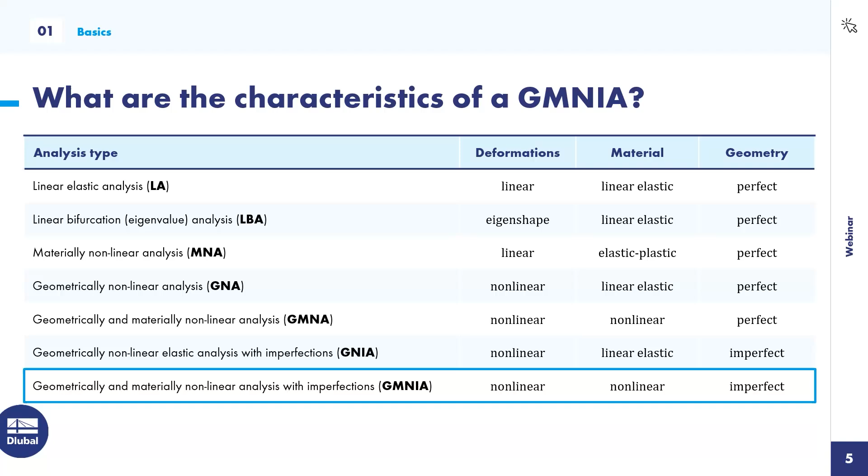Some rules for the application of the finite element method in this context are given in Eurocode 3, part 1.5, Annex C. This will shortly be replaced by a dedicated Eurocode dealing with finite element methods and their application for steel structures, bundled in Eurocode 3.1.14 in the second generation of the Eurocode. I will refer to this new code as well during this presentation.

You can think of the GMNIA as a virtual capacity test, which means that the design load is increased by a load factor until a clear state of failure is reached.

This is usually given by the annex or the base code as 5%, which is tolerable, but there might be some additional requirements in the national annexes.

The critical load factor is then the minimum of those two alpha U values, and this is then checked against the product of two safety factors on the resistance side, namely alpha 1, which describes the uncertainty of the numerical model, and alpha 2, which describes the uncertainty of the load and resistance model.

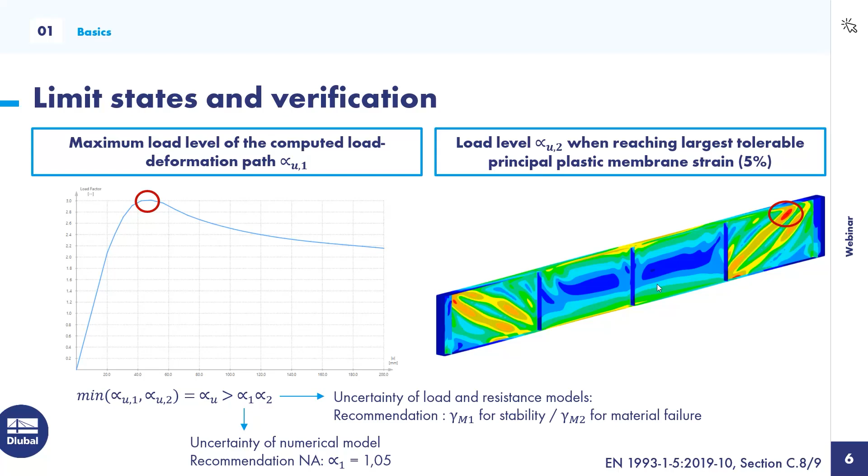So let's move on to the description of the design example for this webinar. We have a welded plate girder with a total length of 18 meters, simply supported at its ends.

There are some virtual purlins that are not explicitly modeled that rest on top of the top flange at the ends and also in the quarter points, transferring loads from the roof structure maybe to the plate girder and also at the same time supporting it laterally.

To avoid local instabilities at those load introduction points, we place stiffeners below them, and we should also take care that the end posts or the end stiffeners are detailed as rigid end posts, so they can anchor back the membrane forces and avoid excessive deformations of the external shear panels.

The cross-section is shown here on the left side, so we have a very slender web plate with a height of 1 meter and a thickness of only 5 millimeters. And the flanges have dimensions of 20 millimeter thickness and a width of 360 millimeters. The material is a mild steel S235.

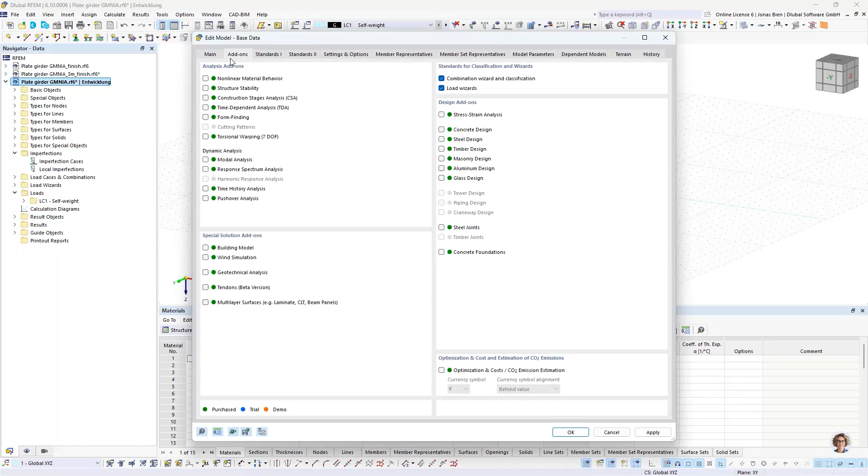All right, after we clarified this, let's go into the program and start modeling this. I have already prepared a fresh file where we can now introduce the plate girder. As you can see, I have no objects here whatsoever, and also if we look into the base data of this file, there are no specific options activated. It's all a standard type of model, 3D and so on.

Okay, so first of all, let's start with the material. We said we want to use an S235. So let's choose one. I always like to choose one that is related to Eurocode 3, but another one would also work.

Then let's move on with the modeling of the member itself. We could either directly go with the surface definition and try to place the flanges and the web plates in the correct locations, and also then we have to assign the correct thicknesses and so on. But we can also use another way: we can first start with a member that has the correct cross-section, and then we transfer this member into a surface model.

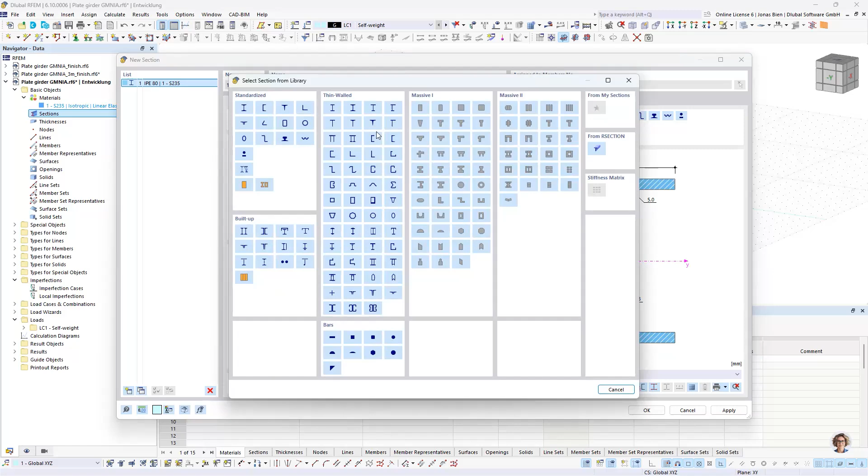So I start with defining a parametric welded double symmetric I-section in my section dialog with the respective dimensions that I want to have. So height is 1020 millimeters, width 360, thickness of the web would be 5 millimeters, and the flanges 20.

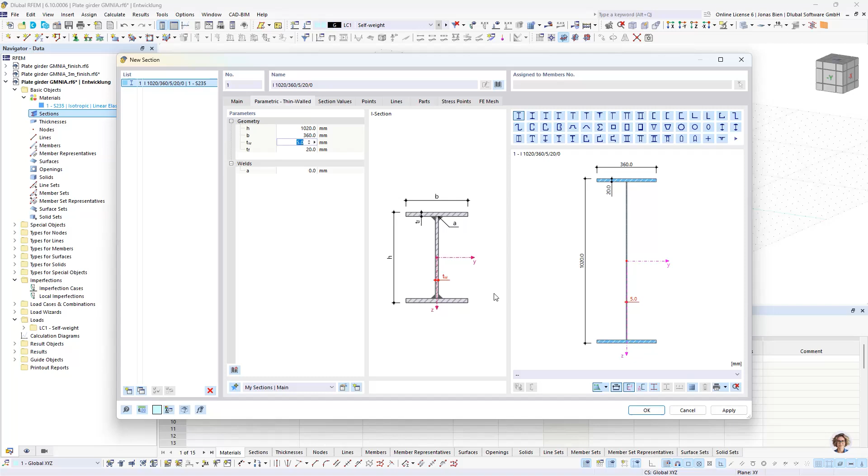So now it more or less looks like the picture that I have shown on my slides. I accept via OK, and then I just place half of my plate girder in the model. So one span was 4.5 meters, so I want to take in the initial model 2 panels, and then we can later mirror it.

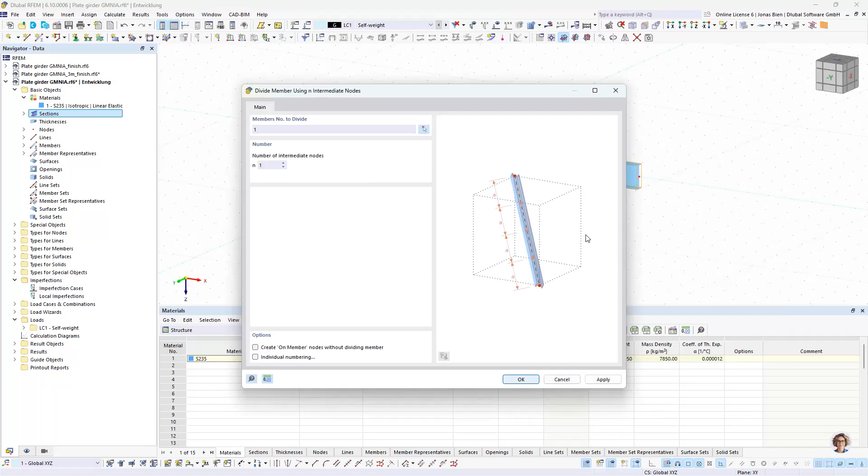So before I generate surfaces from this member, I also divide it, because I want to have a stiffener and some load introduction lines at the central position here. So I first divide this member with one intermediate node, and then I move on and generate surfaces.

And what this does, it already automatically generates these thicknesses that I need to represent this section in a surface model. It creates the nodes, the lines, and finally the surfaces that are necessary for this model. So this is a good starting point, I think.

Next, we want to create the stiffeners to finish the surface modeling part. Therefore, I need an additional thickness of 12 millimeters that I wanted to use for the stiffeners. I can also write a reminder for myself that this is for the stiffener, this is the web plate, and this thickness is defined for the flange plates.

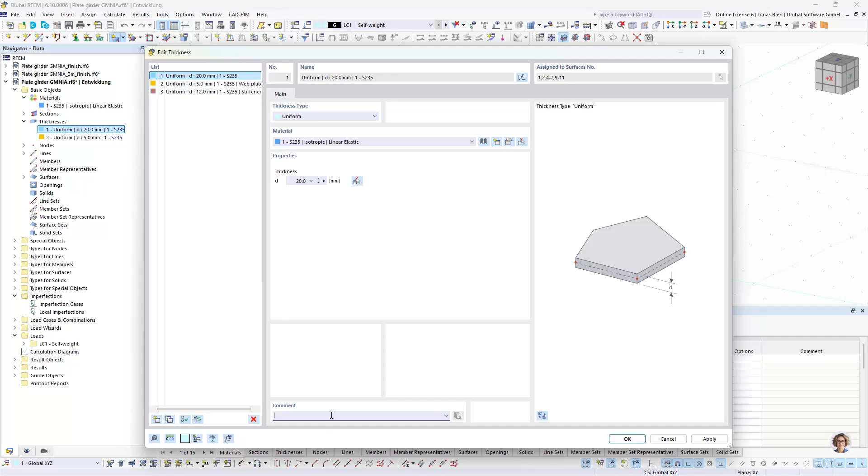Okay, I agree. And then I just place some rectangular surfaces in those positions where I later want to apply the loads. And thinking about this as the left half of our plate girder, we also said we want rigid end posts, so I would generate this by adding an outstanding cantilever part here with an additional stiffener to really have a very compact section at the end.

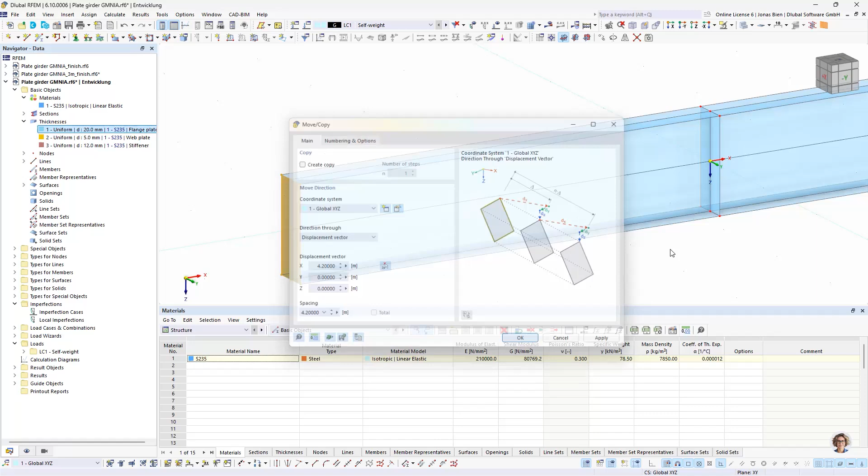I can achieve this modeling variant by just copying this panel here to the end. The length of this is 4.5 meters, and I want a very short and compact cell at the end. So I move the end section back towards the initial position of this stiffener by, let's say, 4.2 meters, and then I have a nice rigid end post without needing to define additional surfaces by hand.

Okay, oops, didn't mean to do that.

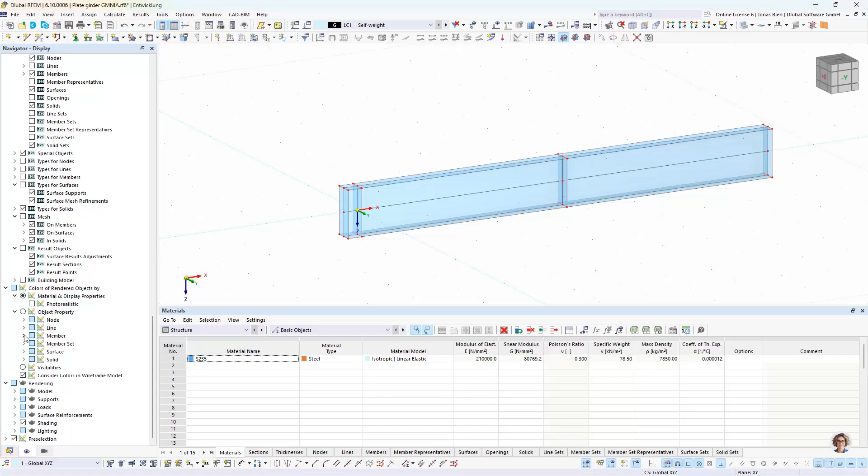So then we can check if we assigned the correct thicknesses. I always like to check the rendering based on thickness, so we get a nice overview of what thicknesses are represented in the model and where they are. This all seems fine to me.

So we can continue with assigning the supports. I want to avoid singularities at the vertical supports, so I try to use line supports at this second line of the stiffener. I just want to support this line in Z direction. I don't want to restrain any deformation along the line or in the transverse direction.

I only support... I already see another problem because we defined those rectangular stiffeners over the existing surfaces, so we have some double lines here. We can quickly merge them by cutting and merging via this tool, and now we have single lines at these locations. That's a quick fix. Now I move on and assign the vertical supports at these two lines.

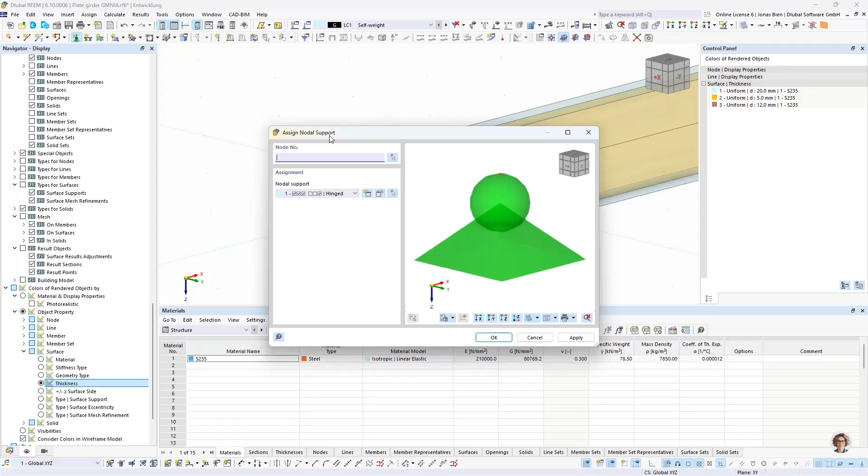Then I need to take care of the lateral supports. These I assign as nodal supports at points that are very stiff. First, I have my lateral supports at the ends and also at these quarter points. I choose as a point of reference the crossing between flange, web plates and the stiffeners. I also need to couple this point in Y direction so it does not tilt.

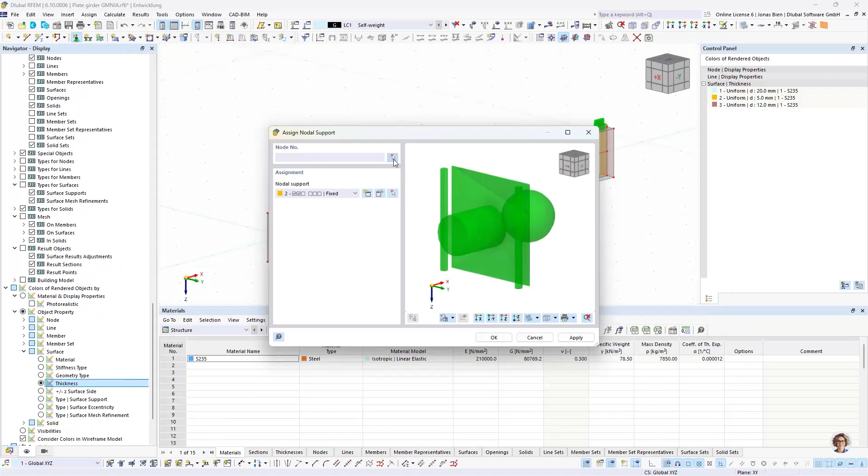Also I need to somehow support my model in X direction. That's why I want to define one support in global X and Y direction at the lower flange, like here. So that would be the respective support conditions I want for my half model.

I can later also mirror them when I want to create the full model. But before we do so, it would be wise to also define the loads, because there we can also leverage the mirror operation. So we go ahead and define our loads.

Maybe one look back to the task description. Here we can already see that we have concentrated loads, three different loads, at the endpoints and the quarter points. The first one represents dead weight, the second comes from snow, and the third comes from wind pressure.

These I want to define separately for those three load cases. So let's start with the definition of the dead load in the first case. I want to apply these loads as line loads, again to avoid singularities when using nodal loads. I could calculate my equivalent line load for a concentrated load of, for example, 15 kilonewtons by hand.

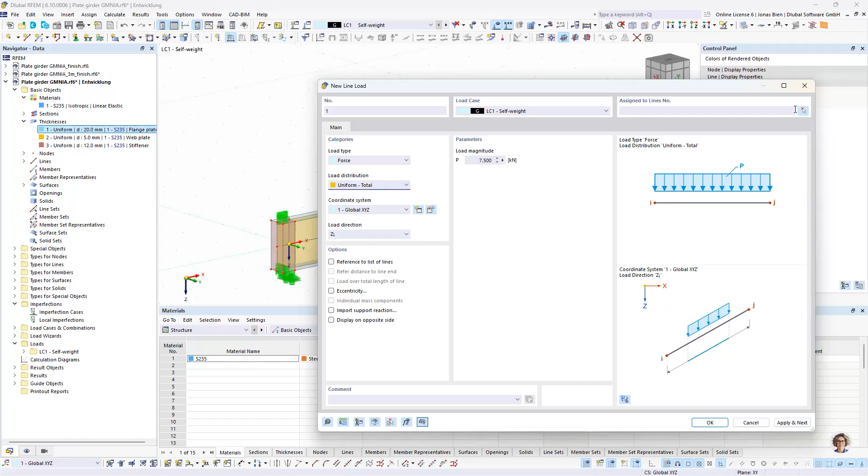But I could also use load distribution type uniform total, where the program does this job for me. I just have to enter the total load I want to apply over the length of one line. Since I have two lines here, I need to divide my 15 kilonewtons by 2 to get the total load for one line. I want to apply this in Z direction, select those two lines, assign it, and RFEM already calculated the correct kilonewton per meter value for us. If we multiply this value by 0.36 for the width of this flange, we get 15 kilonewtons in total, as we wanted.

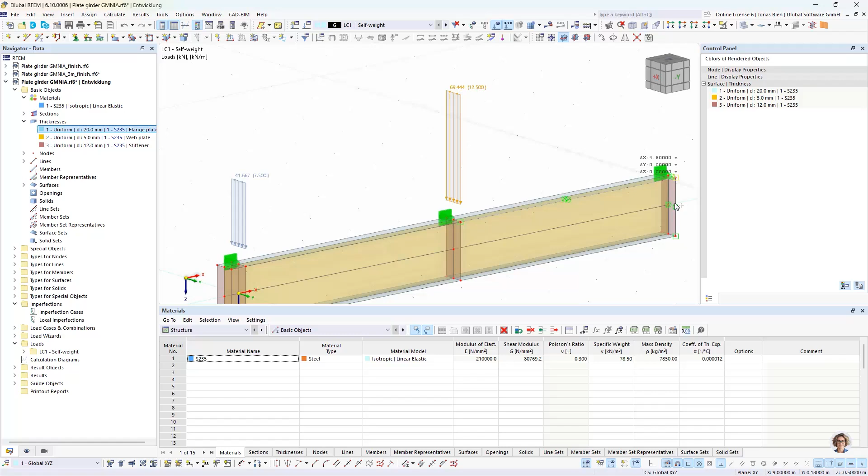Okay, we can then just copy this definition to the internal lines or purlins where the load is transferred to our plate girder. Here we had a slightly higher load, I think it was in total 25, so each line gets 12.5 kilonewton. This definition we can also copy to the central lines here.

Now we make a smart move and generate our second and third load case from our first load case, by copying it. This means that also all loads defined in this load case are copied, so we just have to change the action category. First I want to define the snow loads, and we have to take care to deactivate the self-weight if we copy from the self-weight load case, otherwise that would be considered twice. We do the same for wind, choose the appropriate action category, and click OK.

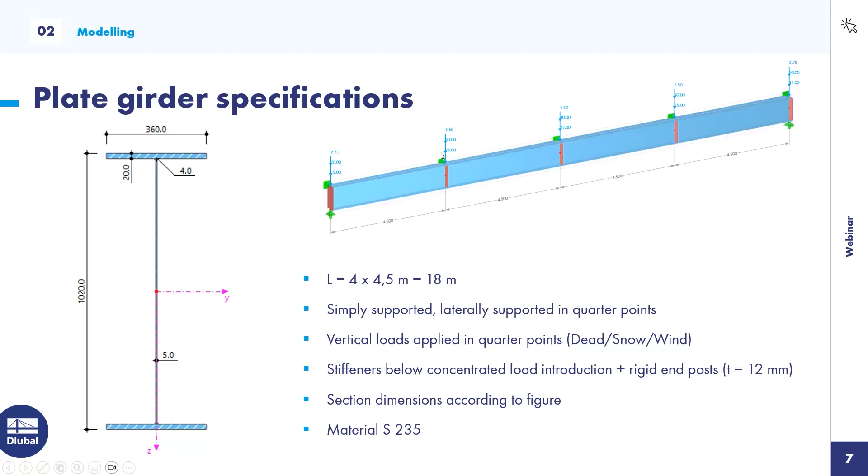Now we can go to the table. This is the easiest way I find to manipulate those load values, because we just want to change values. As you could see in the slide, we have the same load type for all load cases, just different amplitudes. For snow we would have 20 kilonewtons and 40 in the internal positions, and for wind it would be 2.75 and 5.5 in the internal positions. So we just need to change the values basically. Let's do this via the table.

For the snow load, we had 20 kilonewtons divided by 2 and 40 kilonewtons divided by 2 in the internal positions, and then for wind it was 2.75 divided by 2 and 5.5 divided by 2. This gives us the respective concentrated load distributed to those lines.

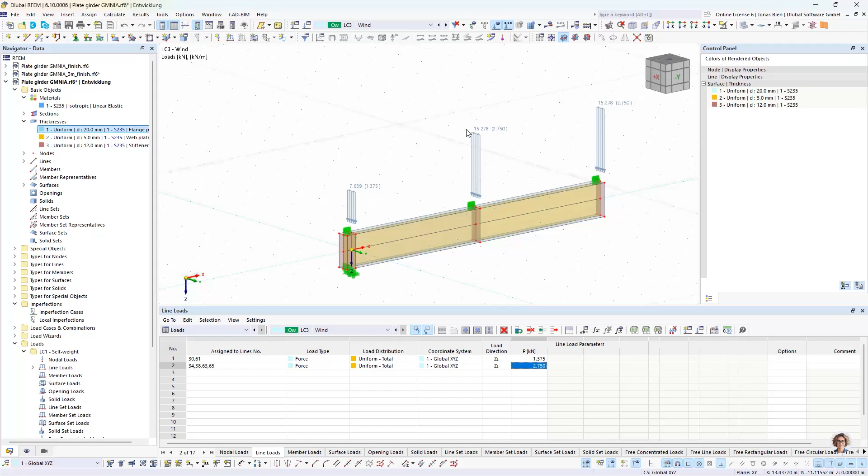All right, I think then we can already mirror the whole thing. Maybe I don't want to mirror this load here, because we have already defined this for the central position, so I don't want to do that again. Now I mirror all the selected objects about the YZ plane, and the plane should go through this point here. I make sure to copy the included loading and click OK.

I think by doing a copy included loading, it also recognized all the loading on these lines and copied it, although I did not manually select it. So now, as you can see, we have a double load here, and we just quickly delete this. Then I only need to do one additional modification of this mirrored part.

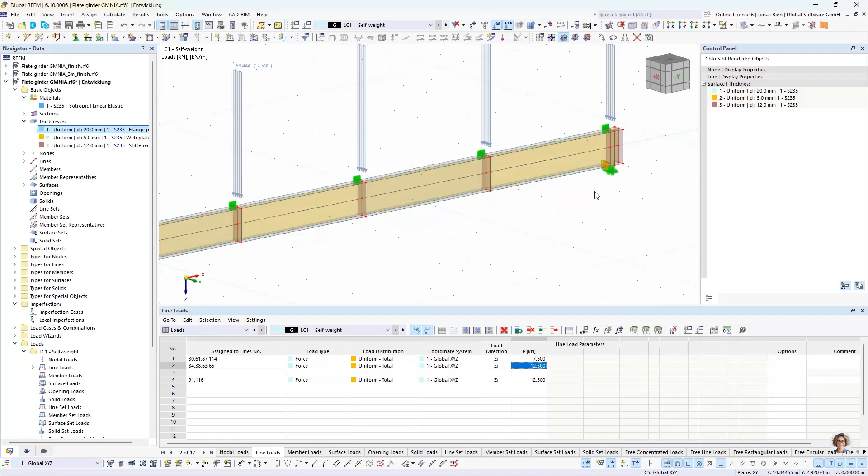I don't want to hold the plate girder in X direction on both sides. I don't want to activate any membrane forces here coming from large deformation in X direction. So instead of using support in X and Y direction at the end node, I just copy the definition from above and place a nodal support that supports in Y direction here instead, so it is free to move in X direction now.

Then one more important part when creating a surface model in the context of steel design: usually our base settings for the mesh are not really suitable. This element length of 0.5 meter is more suitable for, I don't know, concrete slabs and foundations, so not for us. Otherwise we would only have one or two elements over the height of our plate girder, and that wouldn't be sufficient to get a good model here.

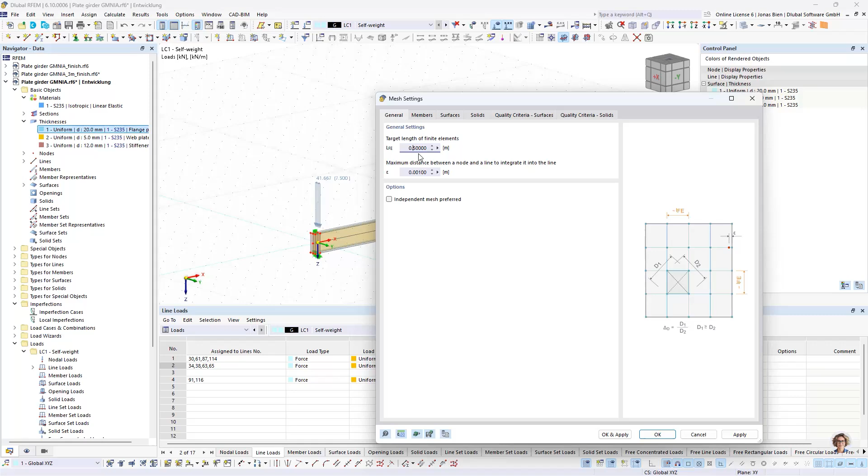So we just use 5 centimeters in the first step and check the mesh visually to see if it is reasonable. I think in the first step this is all fine. It is always advisable anyway, in the context of a GMNIA, to make some sensitivity study of the mesh refinement at some point, but I think this is a good starting point, this level of refinement.

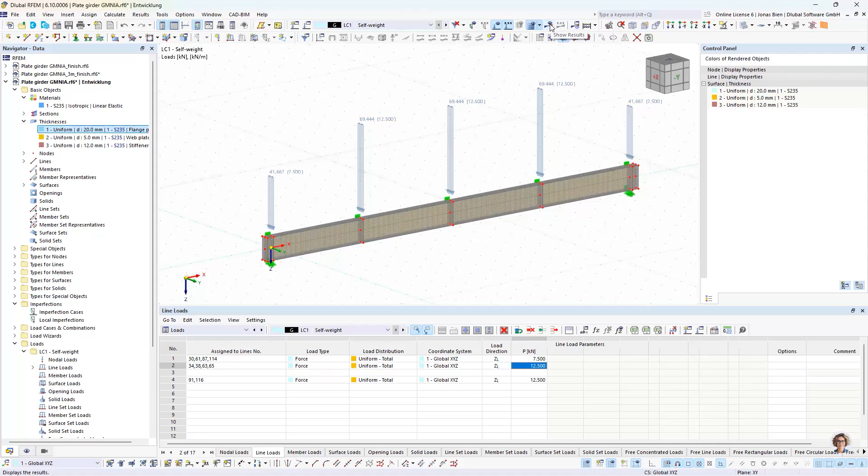We can also check if we defined the model properly by just running one test load case, for example load case 1, and see if everything is connected properly, if we have supported the model sufficiently. It looks quite okay to me. The deformation shape looks as expected. As I said, it can deform in X direction here at the end, so no restraining forces in that direction. We can also check the stresses in X direction. We have only bending here, so everything is as it should be, and this is fine.

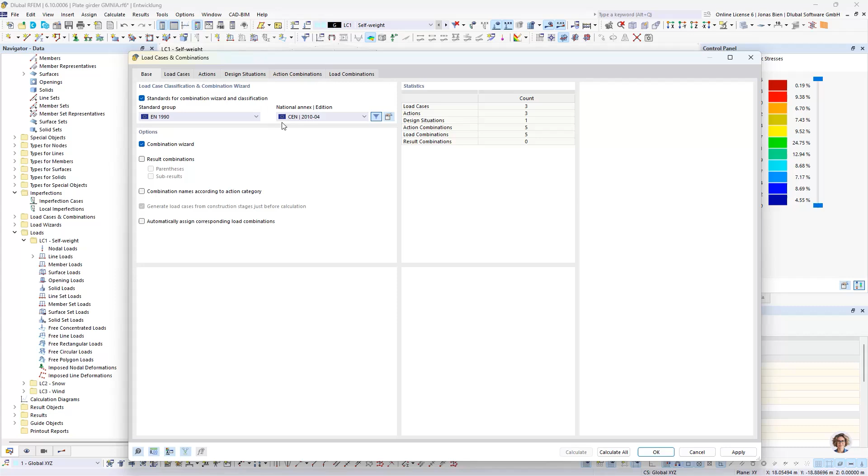Then maybe we need to think of a combination of our load cases, so let's go there as well. By default, we have 4 different design situations that RFEM generates for us in a new model. We only want to do checks in the ULS combination, since we only want to check our model for strength. So we leave that in, and with the combination wizard activated by default, that gives us 5 different load combinations.

But for us here, it is very easy to see that load combination number 3 results in the largest loading, or is the most critical loading combination for our case here. So because I know that GMNIAs are quite heavy on computational time, I want to reduce the load combinations I need to take into account to a minimum.

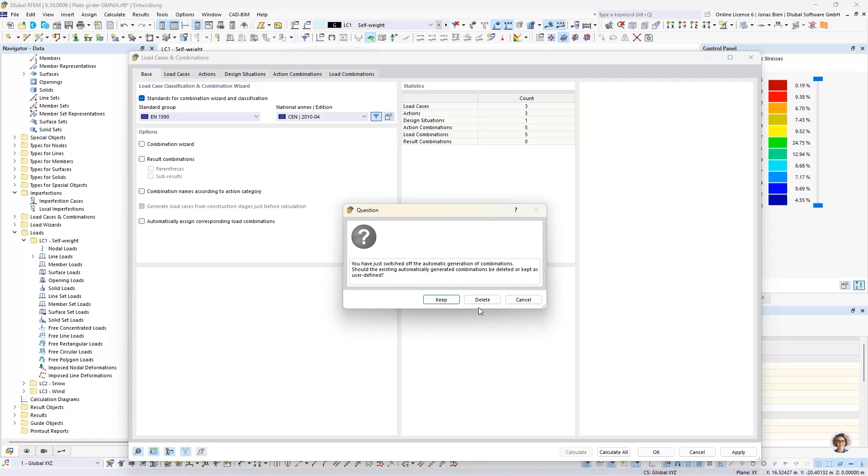So I deactivate the combination wizard, say I want to keep all the load cases and load combinations, and then I manually delete all other load combinations and only leave CO3 for later analysis. And then in the first step, I use first order theory for analysis.

Okay, I think that's it for the definition of our base model, and we can now tackle the special ingredients of the GMNIA. So let's start with the imperfections.

According to Eurocode, residual stresses resulting from the manufacturing process of steel girders need to be taken into account. These residual stresses originate from uneven heating and cooling of the material during manufacturing. In a plate girder, very high local temperatures and corresponding material expansion occur when the web and the flange plates are joined by welding. The individual cross-section parts are joined in this heated state.

And if the component then cools down again, constraint-free contraction of the material is no longer possible, and residual stresses remain in the cross-section. Those stresses are in sum in equilibrium with each other across the cross-section.

The stresses shown here on the lower right side are specified in the draft version of Eurocode 3, Part 1-14, for welded double symmetrical I-sections. In principle, it is possible to consider such residual stresses in RFEM, although a bit cumbersome. But since we occasionally receive customer requests about this, I would like to show you in a short excursus how to approach this problem.

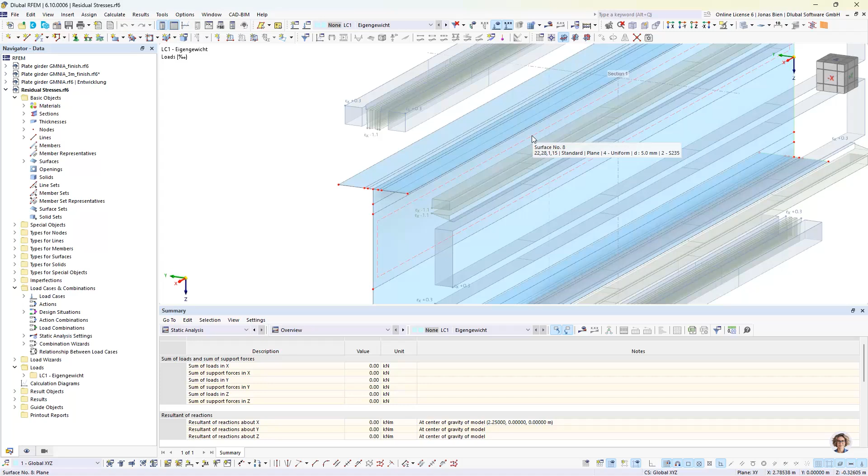But I want to explain the most important steps here. So I have divided my model basically, and then I applied an axial strain state. You can find those under surface loads, load type axial strain. And there you have, you can choose between a uniform and a linear load distribution.

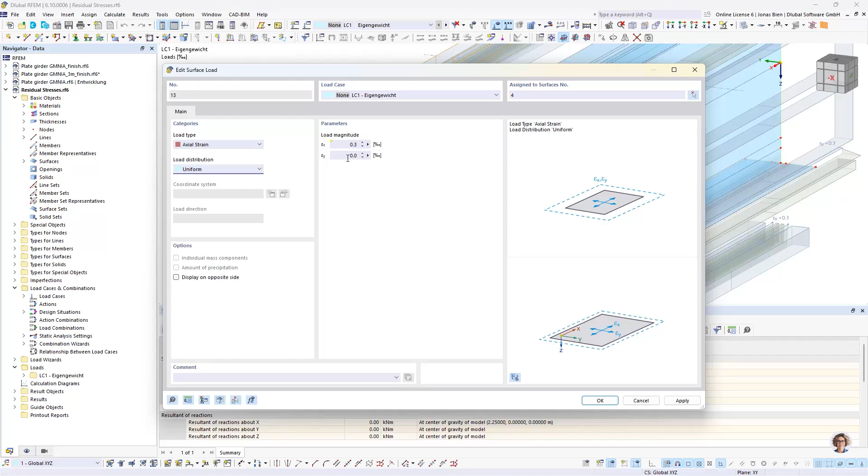And in this case, for this constant strain or stress block, I defined only a uniform distribution with a magnitude of 0.3. And if we check, I've entered this via formula, so I just divided my yield strength by the Young's modulus and divided it by 4. This leaves us with a positive strain, and the positive initial strain leads to later compressive residual stresses. We will see that when we run the simulation.

Similarly, I did the same in the middle of the flange plate, where I defined a block of axial strains with a negative sign, described by yield strength divided by Young's modulus. And then in between, I applied this linear load distribution.

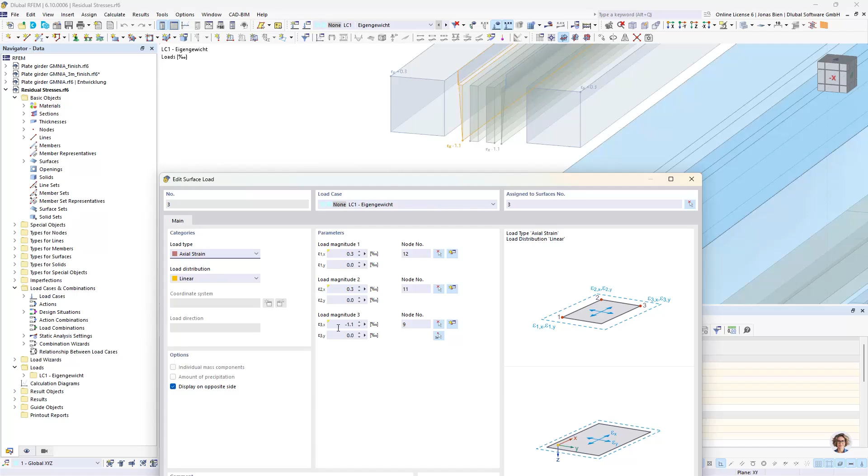I used 3 corner nodes to describe the distribution of my loads. You can check this out in the German webinar if you're interested, but it's pretty straightforward. I defined 2 nodes with a tensile strain and 1 with compressive strain to get this distribution.

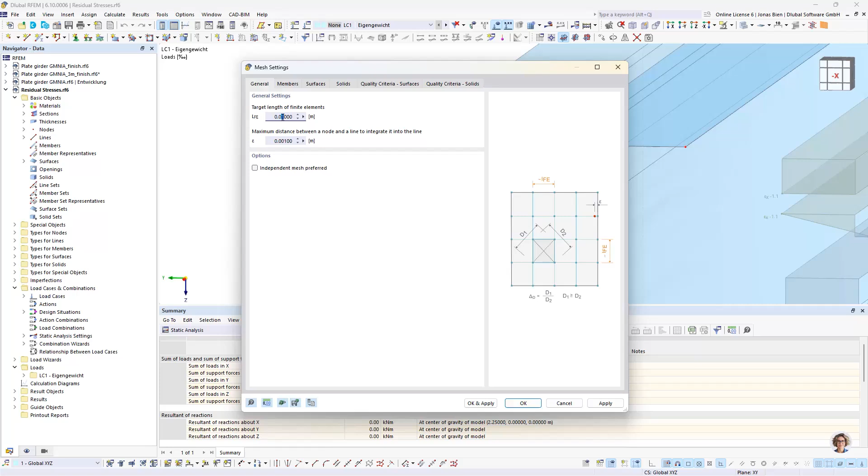distribution over the flange plate, and I did the same basically for the web plate as well. I also changed the mesh size a bit, choosing very small element edge sizes so I have at least 2 elements over each surface. So we can see this linear gradient in the stress distribution and represent this with the mesh size.

Yeah, and that's basically it. So let's check the results. I've already computed it. Maybe one last note: on this end of the girder, I have applied some line support, where I just held basically every node in place, also in X direction.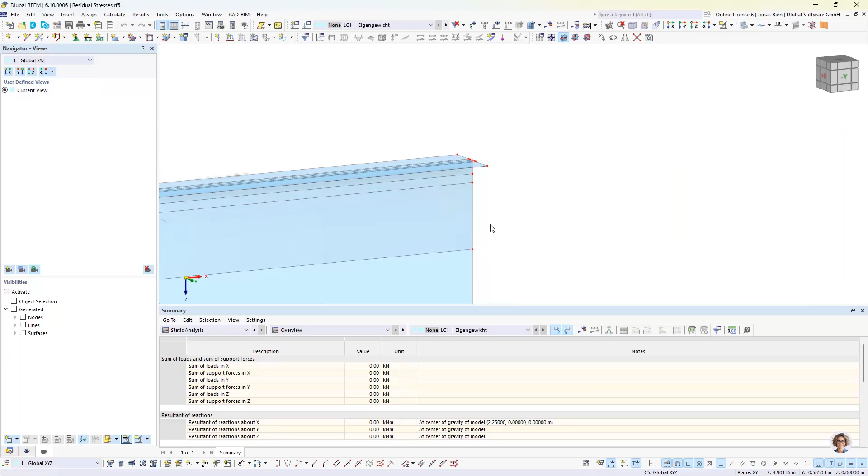This is very important because by doing so on this end of the girder, I restrained every warping of the section and every deformation in X direction, in longitudinal direction. On the other end, I didn't do that, so here all my filaments or fibers of the section are free to move in X direction.

We can see that this has a great influence on the resulting stress state. So here, where we have more or less a disturbed state, where movement is free in X direction, you can see that those residual stresses actually vanish and diminish here at this free edge.

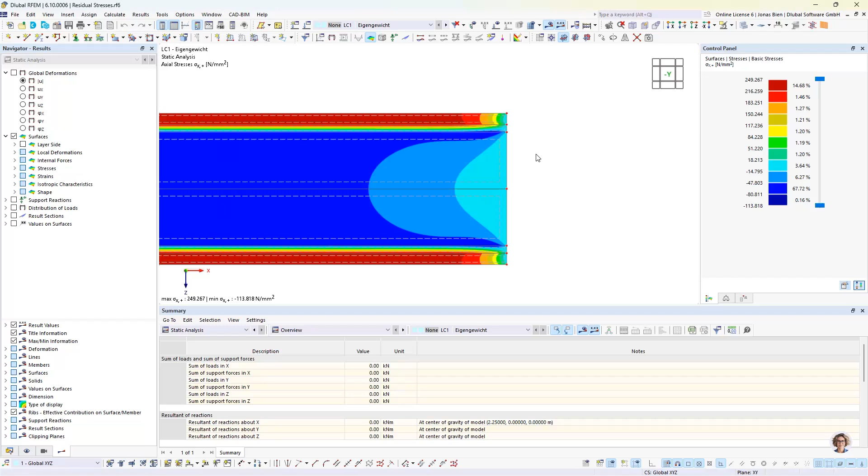But basically, this is what happens in reality as well. If you have such a girder and you cut it in some plane, then these residual stresses would be freed, and you actually see that on the deformation shape.

So the section would go into the wanted shape, or into the shape it wants to go after with the residual stress state, and that's how it would look at this free edge. Of course this is exaggerated here, so the resulting deformations would be very small, but that would happen in reality as well. On the other edge, I held every node in place, so it cannot happen there, just to show you the difference and the behavior we get by simulating this effect.

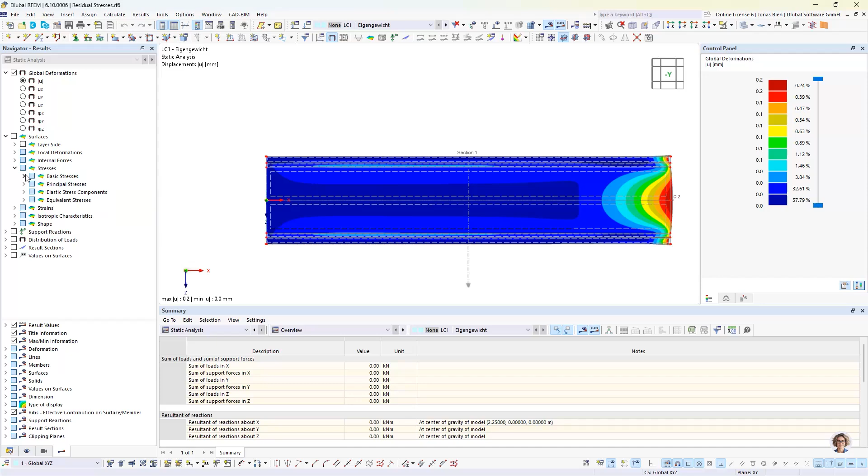Let's check the stresses again. I've now shown the stresses in X direction, and we can already see compressive stresses in the blue areas, and in the red areas we have some tensile stresses. It's not very good to see the actual numbers.

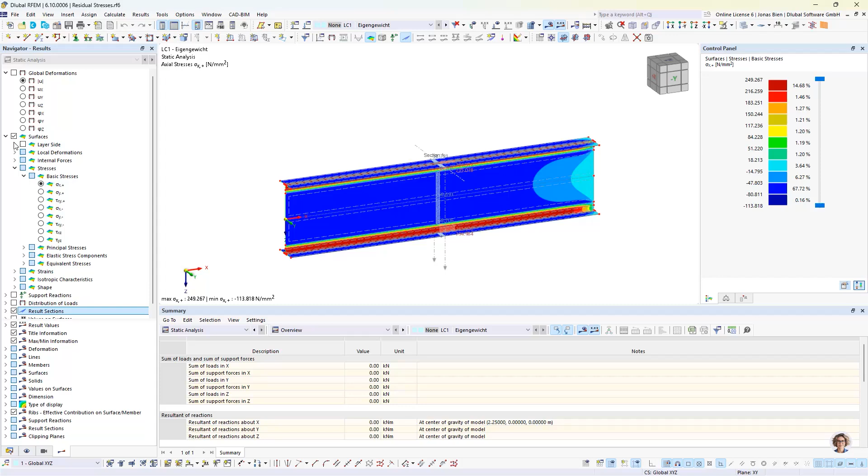That's why I also inserted a section here in the middle, with a certain distance to the member ends to have an undisturbed region. And maybe we can also check the stress state in this section.

Here we actually see that in these tensile zones between flange and web plates, we have almost exactly the yield stress as a residual stress, and in these compressive parts, we have Fy divided by 4. So this is exactly what we wanted to simulate when we look back into our PowerPoint slide here. This is one method to apply such residual stresses in a surface model of this kind.

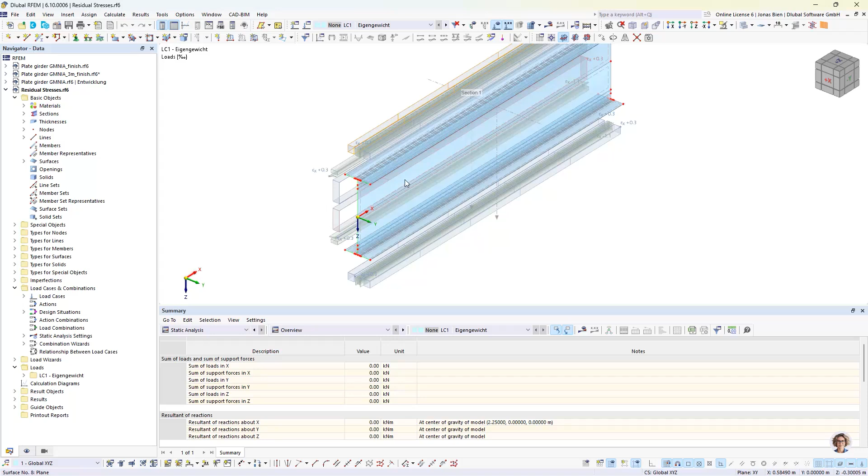Another way would be to not use this load type axial strain, but to define a similar thing via temperature increase. So we could apply some temperature, and with the material properties, we could simulate a similar elongation that the steel would like to make, and since it is restrained over the cross section, we would get a similar residual stress, just that we would need to add an additional step and take into account this alpha elongation factor or expansion factor of the steel, which makes it a bit more complicated.

So this is the easy way to do it. All right, but this was just a small excursus. Let's get back to our actual model. Of course, I will also upload this smaller residual stress model with the slides, so you can study this for yourself.

Okay, back to the presentation.

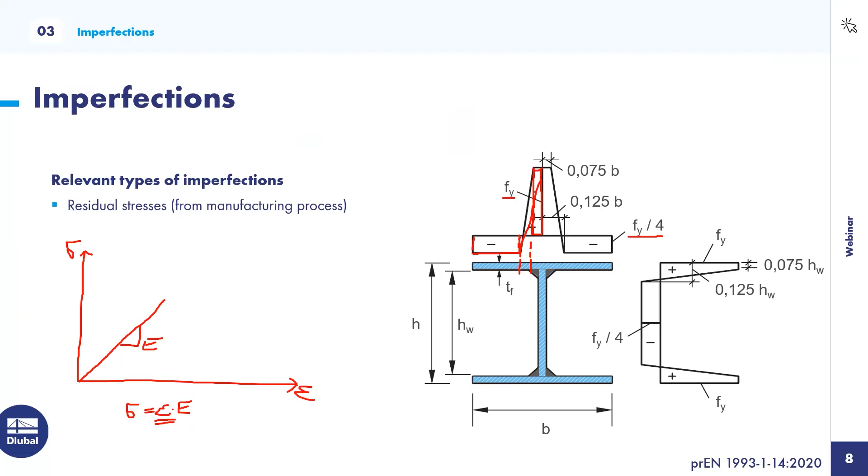We have now talked about one relevant type of imperfection, which is the residual stress, which comes from the manufacturing process, as already explained. In addition to residual stresses, we also have to take into consideration geometric imperfections. These simulate deviations from the standard dimensions or misalignments of elements during erection on the construction site. We know such geometric imperfections from Eurocode 3 1.1, for example, as well, and this is exactly what is meant with this type of geometric imperfection.

So we could either specify residual stresses and geometric imperfections separately, but we have seen how cumbersome already the definition of the residual stresses can be. And also for some sections we might not even have a clear statement for how to approach this residual stress problem. For a double symmetric welded I-section, we have the definition given in Eurocode 3 part 1.14, but there may be cases where this is not applicable.

So luckily we have some alternatives, and Eurocode 3 part 1.5 also allows us to take into account the residual stresses not explicitly, as we just did in this small model, but by increasing the base geometric imperfections. So we just apply geometric imperfections and increase them by some factor. Both types of imperfections are then summarized as equivalent geometric imperfections, and this is the approach that we want to take for our plate girder.

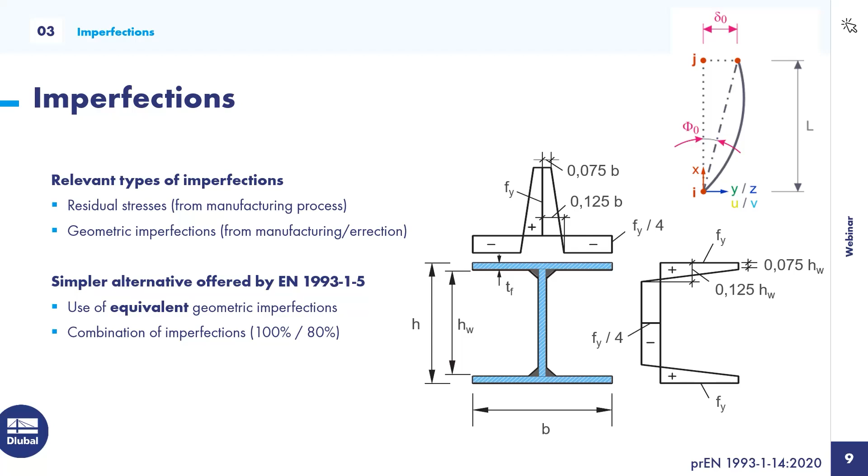Eurocode 3.1.5 describes 4 different types of geometric imperfections that we need to take into account if applicable for our problem. The imperfection for longitudinal stiffeners, shown here on the bottom, is not relevant for us since we don't have any longitudinal stiffeners in our example. However, global member imperfections, as shown above, which would be the first type of imperfection shown here, need to be considered. We are familiar with this type of imperfection from Eurocode 3 part 1.1, as I said already.

And this is exactly what is referenced here in Eurocode 3 part 1.5 for the imperfection amplitude of this geometric equivalent imperfection. So we would go to Eurocode 3.1.1 to check how large our imperfection amplitude would need to be. But before we do so, we need to think about what type of bow imperfections are relevant for our case. Since our girder is loaded in bending about the major axis only, we need only to consider imperfections for lateral torsional buckling.

According to Eurocode 3 part 1.1, such imperfection should be defined affine to the imperfection for flexural buckling about the weak axis, but with half the amplitude. So to find the specific amplitude, we go to Eurocode 3 part 1.1, check table 6.2 to see what buckling curve we actually have for buckling about the weak axis. In our case we would find that we have a welded I-section with flange thickness less than 40 millimeters, and we would choose buckling curve C.

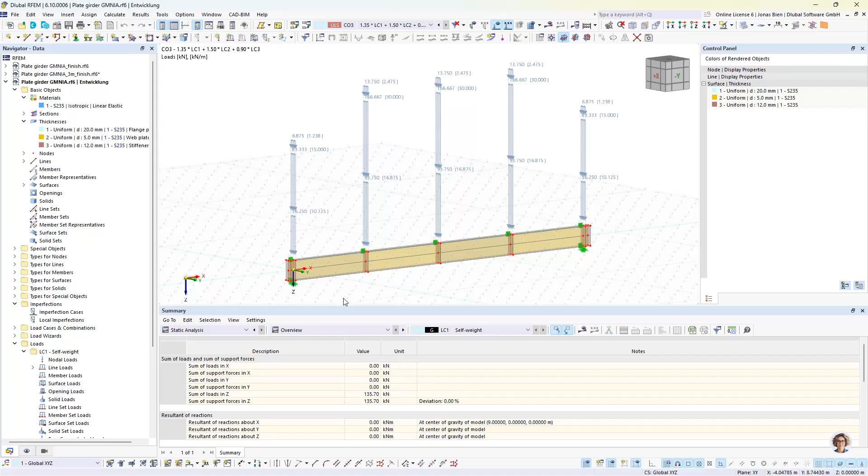Let's do that, and it will get clearer how the concept behind this works during modeling. First, we define an additional load case where we apply a load that gives us a deformation shape equivalent to the imperfection shape we want. I start with defining a new load case and name it bow imperfection, static, to remind myself.

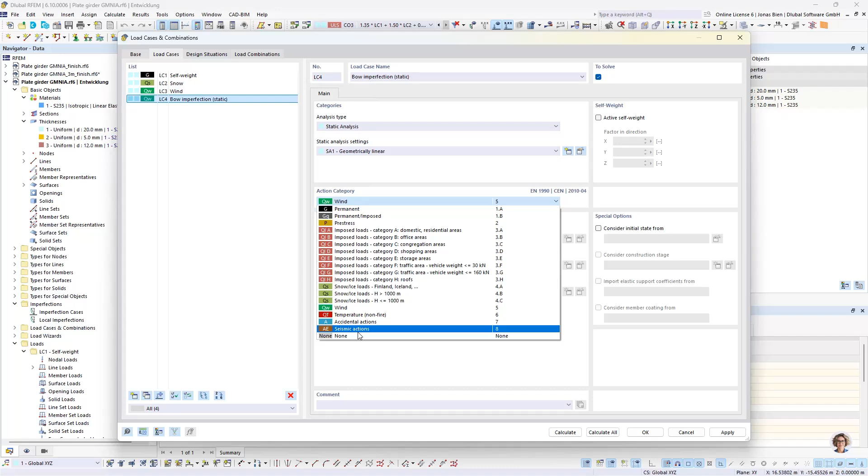For the action category of such load cases I select none, so that it doesn't accidentally get combined with other things if I have a load combination assistant activated. Now in this load case, I define loads that give me the deformation shape I want to use as an imperfection shape. I'll just scale this to a default value. It doesn't matter how large this deformation appears in the static analysis step, since we can scale it later when we apply the imperfection case.

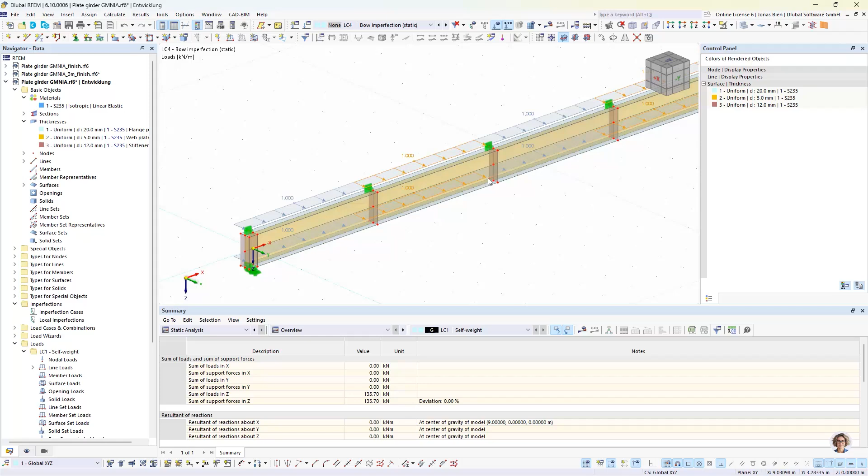First, I want to deform my girder in the y direction by defining loads on those lines between web and flange plates, so I avoid having my section itself deform. I want more or less a member deformation without distortion of the cross section. So I just apply this dummy load in one direction, and then I alternate the direction of the deformation.

Now if I run this analysis for load case 4 that I just defined, we hopefully see some kind of bow-shaped deformation here. Let's check the global deformation—yes, this looks exactly as expected. I get a bow-shaped deformation shape with zero points at the inflection points and the quarter points where I wanted them.

So this is a good basis for my imperfection shape. You can see the maximum deformation here is quite small, which is of course too small for the imperfection we need. We said we want to define the length between these inflection points divided by 300, which would be 4.5 meters divided by 300.

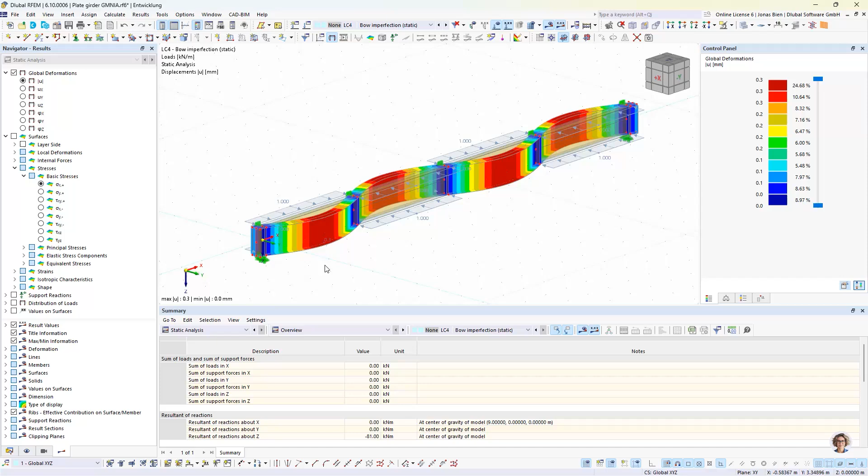That gives 15 millimeters, but that can actually be set in the second step, where we define the imperfection itself. In this case, we want to use an imperfection type of static deformation. There we reference a load case or load combination from which to adopt the static deformation, and then scale it. So I want to source my deformation from load case 4, and scale it spatially, just as it appears

here when I check the total deformation plot. I want to set the magnitude, which I can handle via formula, to 4.5 divided by 300, giving me 15 millimeters. Now I have this imperfection case 1, which I can also calculate or simulate, and it will scale the deformation shape from load case 4 to the value I want, 15 millimeters—and that's exactly what we get here.

It's nice to check this, and then we can apply this imperfection as we usually do—here, for example, to load cases or load combinations with this option. But we are not finished yet. We need some other imperfections that we need to apply to our structure.

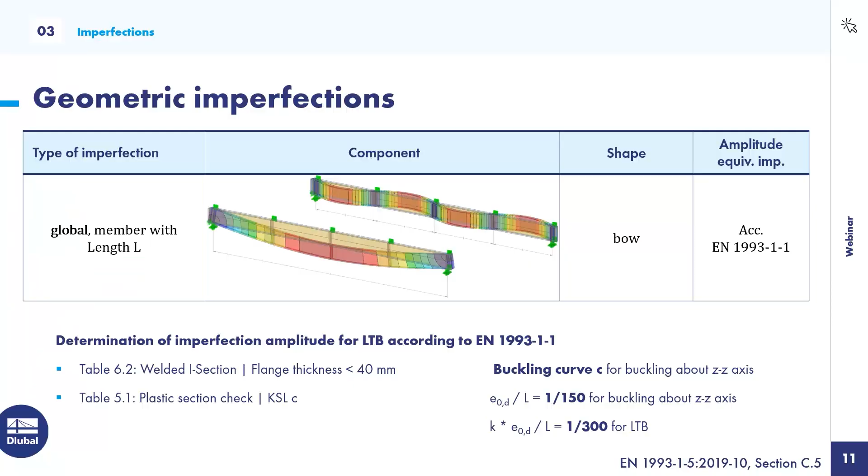So let's go back to our presentation. The first step is done—we have the global bow imperfection considered, but there are two more geometric imperfections in Eurocode 3 part 1.5 that need to be taken into account if applicable: the local buckling shape deformations in the buckling panels or potential buckling panels. If we use geometric equivalent imperfections, the amplitude should be the minimum dimension of the panel divided by 200.

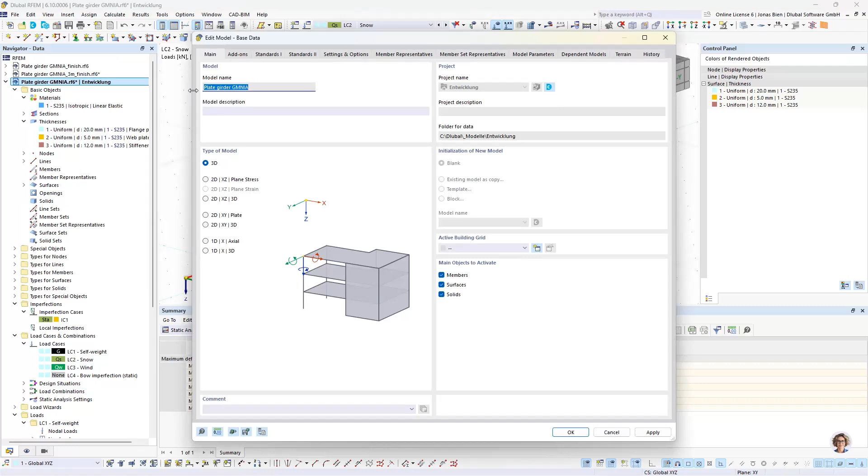Let's see how we can apply this buckling shape affine imperfection with this specific amplitude in RFEM. To get a buckling shape deformation, we first need to do a linear buckling analysis. For this, I activate the structure stability add-on, which gives me access to linear bifurcation analysis, and I want to set this up for load combination 3, where my design loads are defined and combined.

For this load combination, I want to get some eigenshapes and choose the critical one from that. Four eigenshapes is maybe too low a number, so I want some additional information and set this value up to 20. It will now, after defining the stress state in my structure, calculate the linear bifurcation factors assuming everything is perfectly linear, and besides the bifurcation factors, I will also receive my respective mode shapes.

So this takes a bit. I want 20 mode shapes, and these are quite a few elements, but it should finish very soon.

So now, in addition to the static analysis results, I also get stability analysis results. If you are interested more in this linear bifurcation analysis and what we can do with it, check out my last webinar on this topic. I think it was called something with linear bifurcation or buckling analysis in RFEM 6 and RSTAB 9.

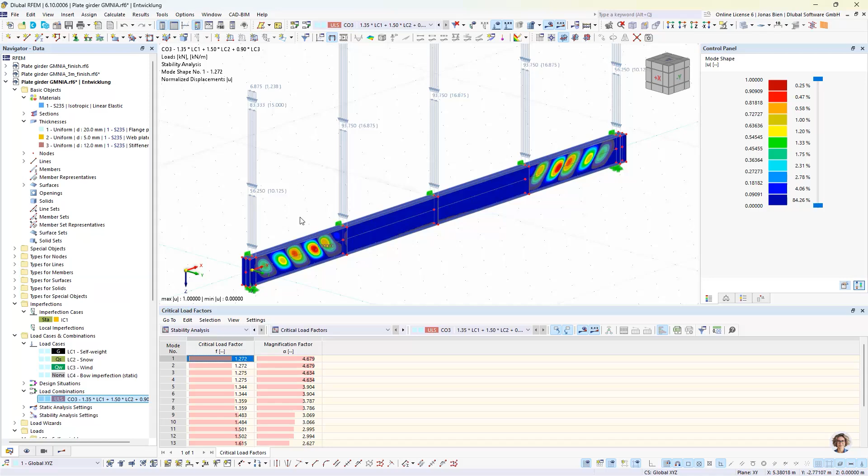So we will now, for the first shot, so to say, go with this first imperfection here. And how do we get this buckling shape, or how do we bake this into an imperfection? We again define a new imperfection case, this time of the type buckling mode. This is now available since we have activated the structure stability add-on. It wasn't before, so maybe let's also give those imperfection names. Local imperfection, and okay, I need to finish the definition.

So again, as in the static imperfection case, we need to source the deformation from somewhere. In this case, we source it from load combination 3. And we said for the start, we just take buckling mode number 1. And we also take an arbitrary deformation direction. We scale it spatially again, and as an imperfection magnitude, we set the minimum of the panel dimensions.

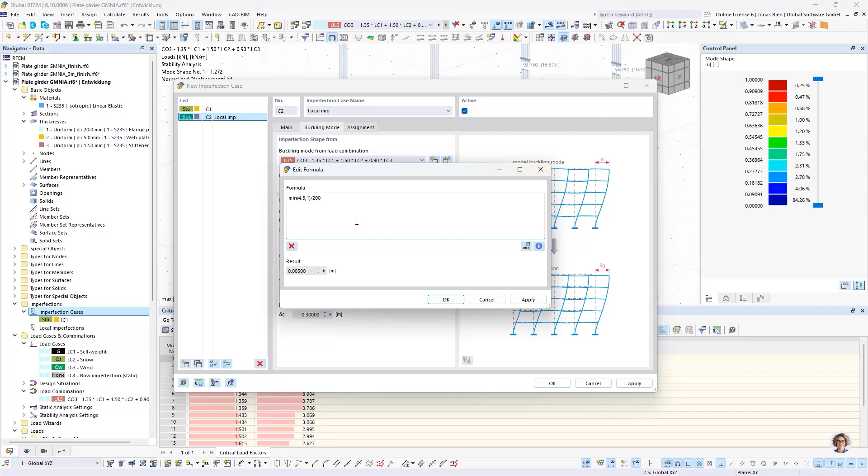So panel dimensions would be 4.5 by 1 meter divided by 200. It's always very convenient to just use the formulas to plug this in, and you don't need your calculator. You have a reminder if you are unsure, you can check the formula again and so on. So this is very handy. Okay, so that would be this definition.

Then let's also rename imperfection case 1 global imperfection, so we can have a quick distinction between those. And now if we also solve this second imperfection case, we should get the eigenshape that we just saw now, but now scaled to 5 millimeters maximum deformation. So that's perfect. All right, so 2 imperfections are now already defined.

Let's go back to the presentation, because there is a third and last type of imperfection that we must take into account, and this is flange twisting to generate. So this flange twisting we need to consider between different sections. So in our case, we have some transverse stiffeners, and between those stiffeners we need to account for this bow twist, and the bow twist should have an amplitude of 1 divided by 50 times half the flange width.

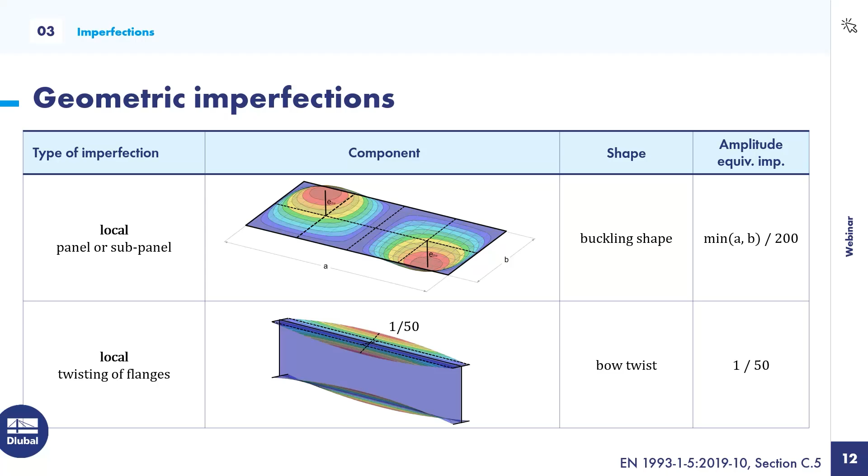And the question is again, how do we do this in our program? Because neither the static nor the buckling imperfection type are really helpful in this case. But what we can always do in this kind of analysis, we can always like burn or engrave the imperfection into our basic geometry. And I want to show you this as a third option. So this means, of course, we need to redefine the model itself. But also in this case, or with the right strategy, that's also not a lot of additional work. In our case, we can just change the type of this line from polyline to arc.

Then we set a control point in the middle of the mid length of this arc, and then we set the arc segment height to the imperfection amplitude. So basically we need to change the z coordinate of our control point.

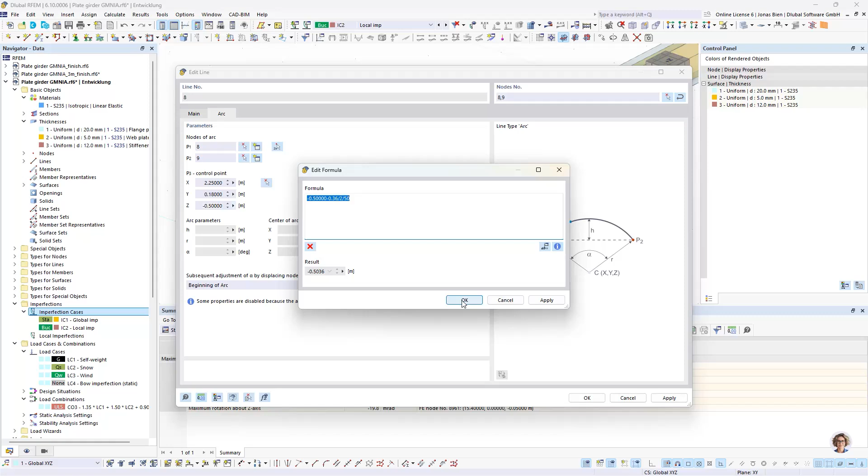I again do this via formula, and I add to it the flange width divided by 2 divided by 50, and apply this change. Now we will see that when we look from the side, this is not a straight line anymore, but it's curved, and this will lead to a twisted flange in the end.

That's perfect for our imperfection. But we also see that now we have some problem, because our surface here is gone, and this respective surface is now marked with red color. That is always bad, but it's a very easy fix in this case, because we defined initially this surface as a plane surface. This is no longer true, because one of the boundary lines is now an arc, and we can just fix it by changing the geometry type of the surface from plane to quadrangle, and this resolves the issue.

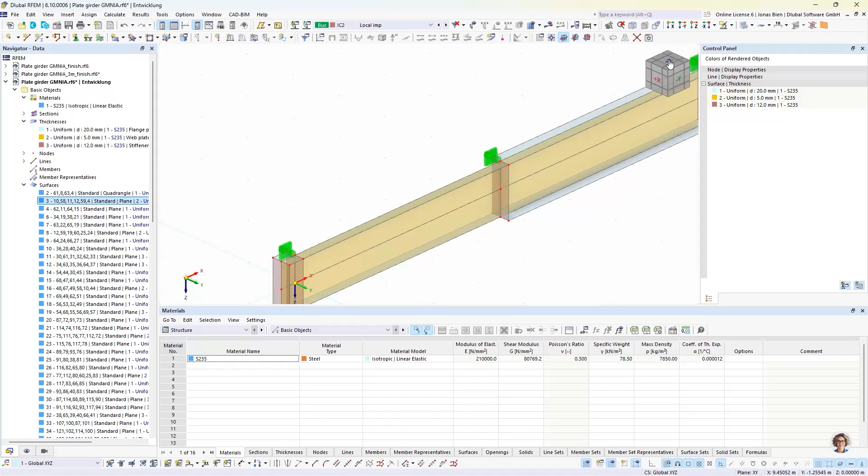Now the question is, how do we proceed from here, because there are many surfaces that we need to change. But instead of doing all of this manually, we can be a bit more clever and use some modification functions to copy this imperfect geometry to the other locations along our member.

So in the first step, we could mirror this surface, or rotate it over the x-axis. I think that would be the most appropriate approach, by 180 degrees. I create a copy, so this axis should be the axis of rotation, and the axis of rotation should go through this point.

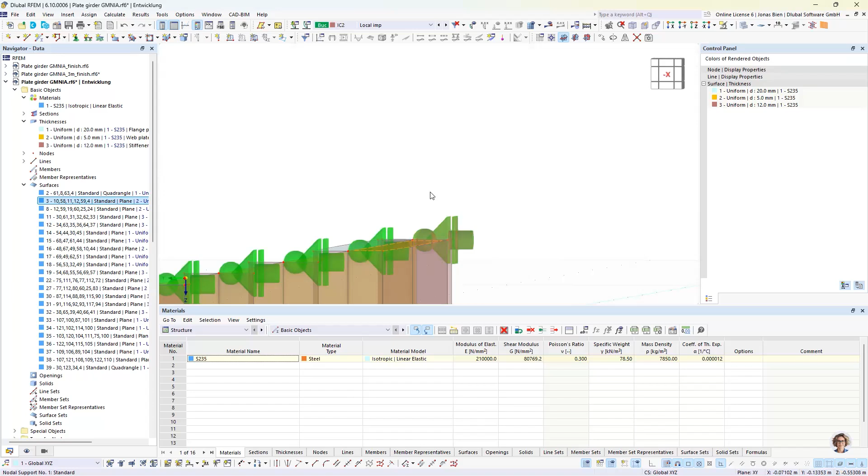I click OK, and now I see that there's an imperfection on this side of the flange as well, but in the different direction. That's how I would assume this flange twisting would look like over the complete width.

And now I can just copy those two surfaces from the upper flange to the lower flange. And in the last step, I take all those flange plates

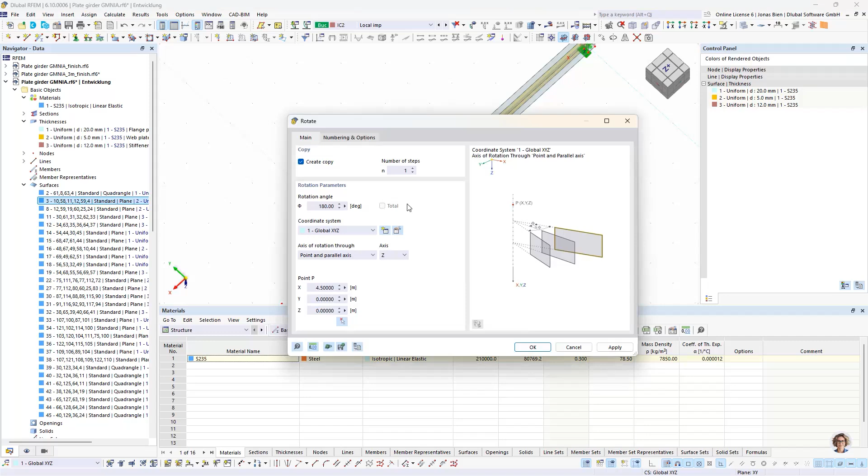and rotate them again, but now over the z-axis, the vertical axis, and I carefully choose my location of the rotation axis, like so. And now I have to do this two more times to complete this definition for the whole member length.

As you can see, by leveraging these tools in RFEM, it's quite easy and quick to create such imperfect geometries.

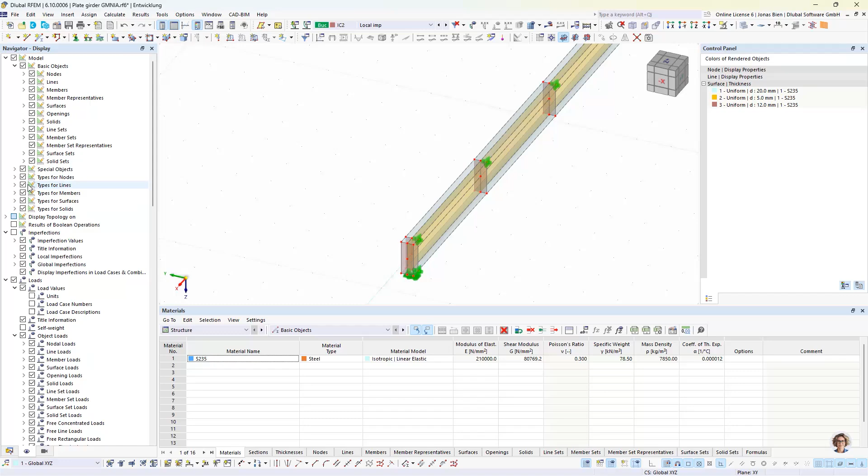So let's actually check how this looks now. We can clearly see that there is some flange twisting now modeled here, exactly as we want. It alternates from one inflection point to the other one. So this should be the most critical case in this scenario, or the most reasonable assumption for such flange twisting imperfection.

Okay, so now the last question is, how do we combine all these imperfections together? In Eurocode 3 Part 1.5, we have a combination rule for equivalent geometric imperfections. We have one primary imperfection that we assign with 100%, and the other ones we take at 70%.

But just to make things a bit simpler here, I would just take them all with 100% amplitude, because most of the time, or in most cases, there's always one or two imperfections that are not really relevant or critical for the end result.

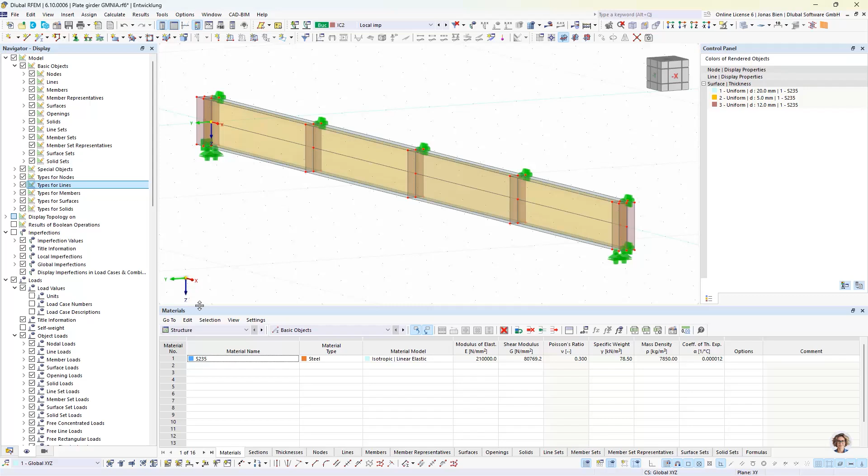So we could either put in a lot of effort to select the most critical one and apply 100% amplitude magnitude to this, or we can just, on the safe side, assume the full 100% for all imperfections, and the ones that do not really affect our simulation will just more or less do nothing. Of course, we could refine it later if we want, or if we find that our solution is not economic, but due to time limitations, I don't want to do that here.

So instead, I just generate an additional imperfection case with a group of imperfections, where I now superimpose the two imperfection cases, imperfection case 1 and 2, and I can do this very conveniently over this table, where I just define that imperfection case 1 should

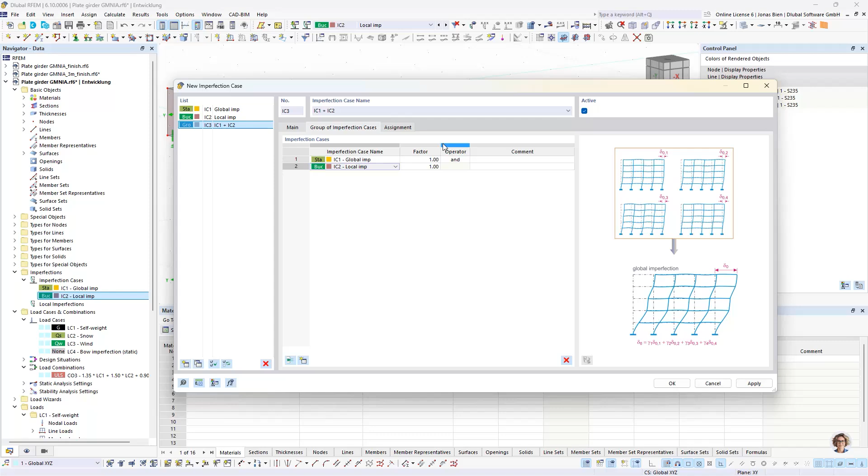be present together with imperfection case 2. You could change direction here very easily by modifying this factor, or you could also lower the amplitude by just putting in 0.8 or something, if you would just want to apply 80% of the imperfection—that would also work. And then I just need to assign this group of imperfections to the load combination that I want to use for my GMNIA.

For now, we only have this load combination 3 that we used, and we also need for the buckling shape imperfection. So we need to have this still defined, so I will not alter that or take this as my GMNIA load combination, but instead I want to copy it. And this one I then want to run the GMNIA analysis on. This means I want to consider the full set of imperfections. The flange twisting is embedded or engraved into our model, and the other two imperfections are now taken into account in this load combination here.

Then for a GMNIA, as we heard in the introduction, we need to take into account geometric nonlinear solutions. So we want to solve this assuming large deformations. This means I just need to change the static analysis settings to large deformations.

Of course, there are a lot of parameters you can play around with. You can change the solution method, the solver method, but in our case, we will stick with the default options since we don't have too much time to explain all the differences, but our online manual gives good guidance, and I think also in our old webinar I tackled this a bit, so feel free to refer to this.

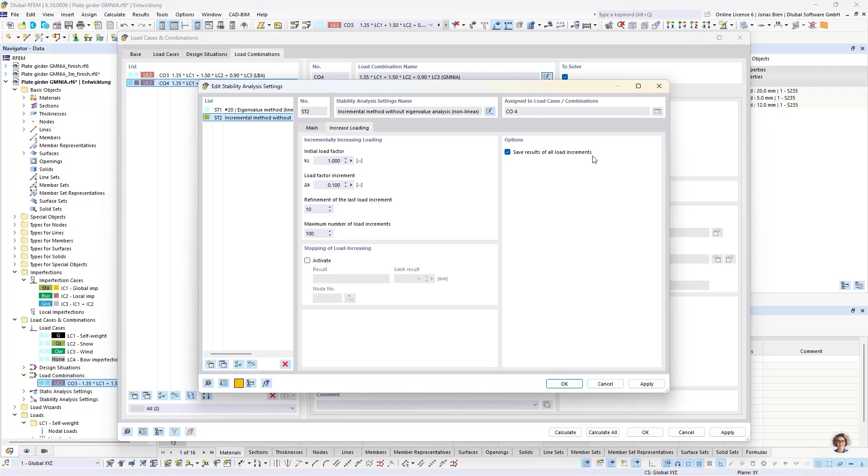But the default options are quite okay for most cases, so I will stick with them. But what I would recommend, or highly recommend even, would be to save results of all intermediate load increments, because analyzing those intermediate deformation results or stress results, strain results, gives a lot of valuable information to assess the failure mode and the behavior of the structural elements. So I would always recommend to do that.

And with this, 95% of the job is done. The only thing left is the nonlinear material. In the beginning, we defined a linear elastic material here without putting too much thought into that.

But we of course need also a nonlinear material, and to access all the nonlinear material models in RFEM, we need this additional analysis add-on here, and we also need to activate it for our model. And when we do so, we finally get access to all those nonlinear material models.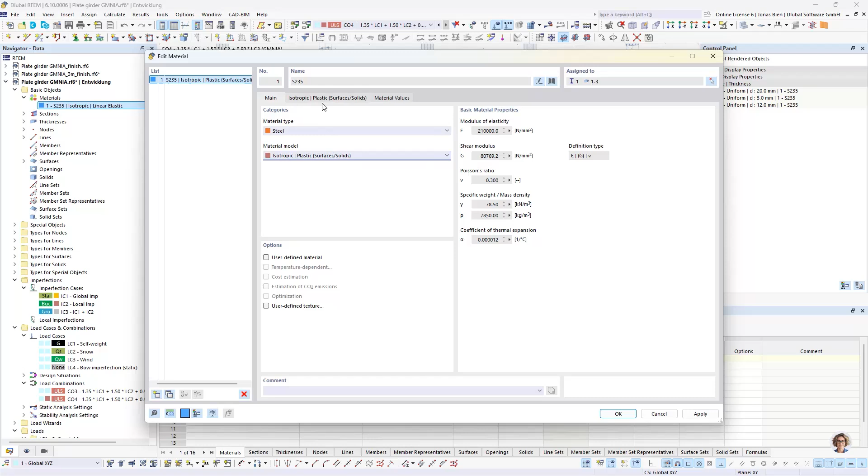And for our job, I want to use a plastic isotropic material model for steel, for surfaces and solids. And the von Mises failure hypothesis or yield hypothesis is quite fine for us.

I don't want to spend too much time with the material definition. I talked about this also in our older webinar. So if you are interested to see what options the Eurocode gives us and what is suitable for such an analysis, I would highly recommend to check the old webinar.

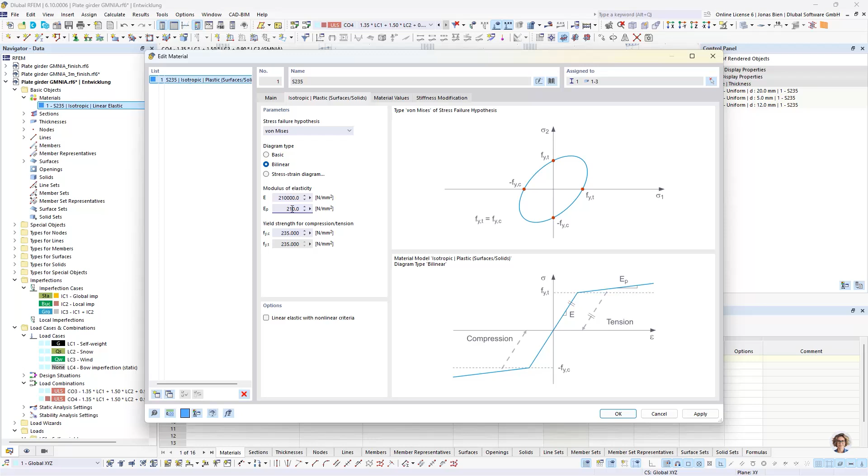But now I will just go ahead with a bilinear stress strain model, and I want to use a hardening modulus of 1/1000 of our initial modulus of elasticity, which is valid with regards to the Eurocode rules. And because I have now taken a user-defined hardening modulus here, I also need to reset my yield strength because I made my material model a user-defined material model.

Okay, and this would be all the steps necessary to set up the GMNIA analysis. The solution of this problem as we defined it would probably take like 4 or 5 minutes, and I don't want to bore you with this simulation.

So I have already calculated this, or a calculated version of this. It should be more or less the same model. The only thing I think is different is that I also baked this bow imperfection into the geometry, and only the local buckling shape imperfections are defined as an imperfection case.

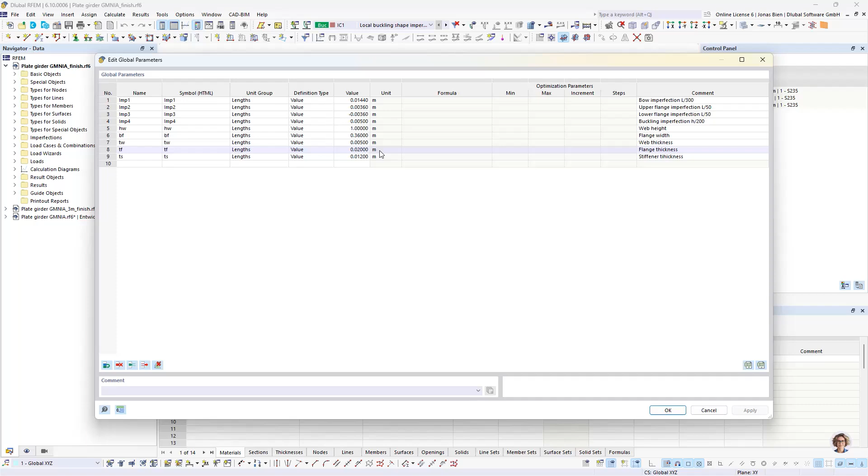But in addition, or therefore, everything is parameterized in this model, and this is also the model I will hand over to you with a presentation and so on, so you can play around with these numbers and do your own investigation on your own geometry and your own plate girders if you like, and you can vary stuff very easily.

So with this being said, let's check the deformations or the results of our load case number 4. Since we have conducted a nonlinear stability analysis, we also have results for that. And what we already see is that the highest load increment that converged was 15, with a load factor of 1.95, which is quite far away from 1. Or even if we consider the safety factors that I initially mentioned, it's quite far away from that. So that's already a good sign.

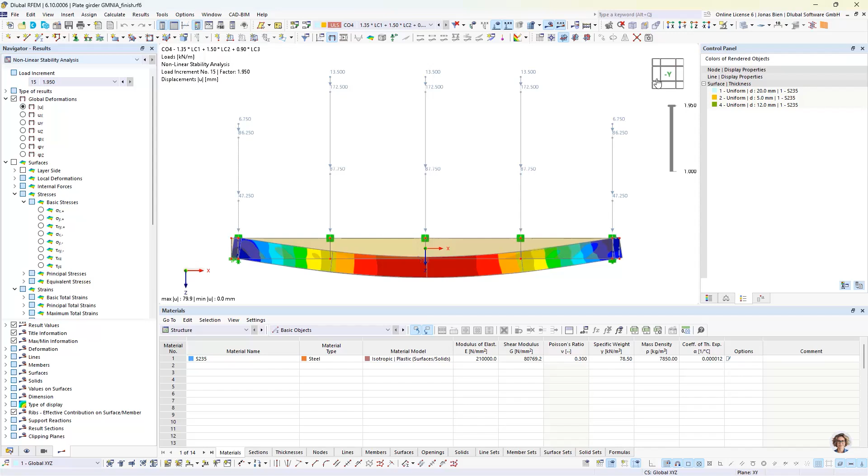And since we saved all intermediate results, we also have this slider that we can leverage to check different results during the calculation. For example, one thing which is quite interesting is if we check the lateral deformation. I can just quickly get rid of the model and all the stuff that we don't want to see.

But you can also now animate the deformation over the course of the simulation. This is also quite a nice feature, and what we see as we approach the maximum load factor is that the lateral deformations of the compressed flange accelerate - they really increase a lot with a small increase of load. So this would already, from looking only at the deformation shape, give us some indication that probably lateral torsional buckling is the failure mechanism here, and is the reason that after this load step, no more additional load steps converged, so to say.

We can also check the load deformation history, the global one, for example. We can display a calculation diagram where we compare the load factor with the maximum deformation, and we can see that the stiffness of our system approaches more or less 0 at this point.

And negative stiffnesses are something we cannot compute with our solver. You need special solvers that are able to compute also the softening part. So this is probably the most that we can get with our methods of this analysis, and that would then also be the load factor that we would take for our failure criterion number 1.

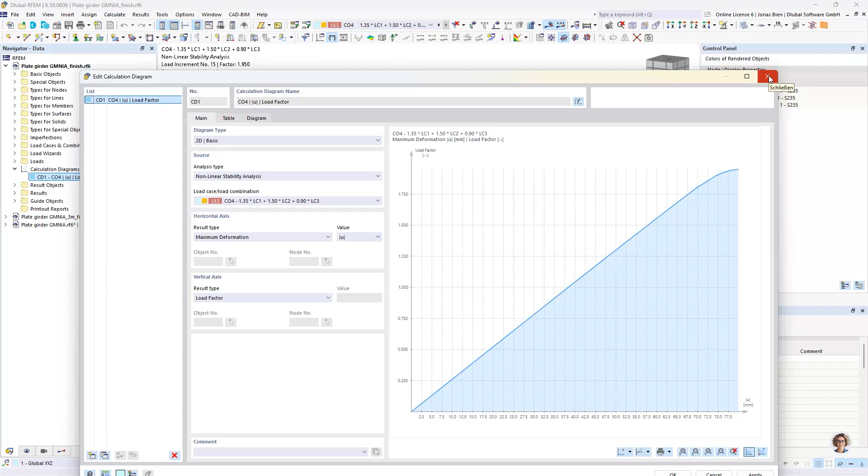And when we remember the failure criteria for GMNIA analysis according to Eurocode 3 part 1.5, there was a second one mentioning plastic strains. So let's also address this and check plastic strains in the model.

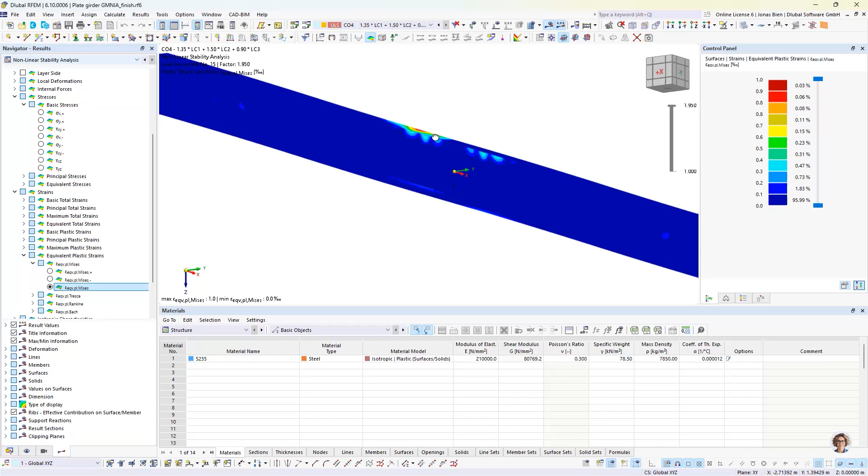And we see that at the end, so at the maximum load factor, we have strains of approximately 1 per 1,000 in the flange region, in the upper flange at midsection, where our compressed flanges actually deform most, and also in the transition between flange and web plate. There are only very minor strains visible in the shear panels itself.

So this would not be the failure criterion that the strain-based check would be relevant for, and we would only check the 1.95 as a maximum of the load deformation curve against alpha 1 times alpha 2, which would definitely be lower than this. So that would be our check, basically.

So this is quite interesting for me, at least, to get a feeling for the failure mode and to check what the deformations look like during this calculation, and what happens if we push over the linear behavior of this model, and what happens then.

And it's in the next step also interesting to see what happens when we change certain parameters. For example, I simulated the same girder with the same loading conditions, just with shorter buckling panels of 3 meters. And when assessing the results here, it looked quite different.

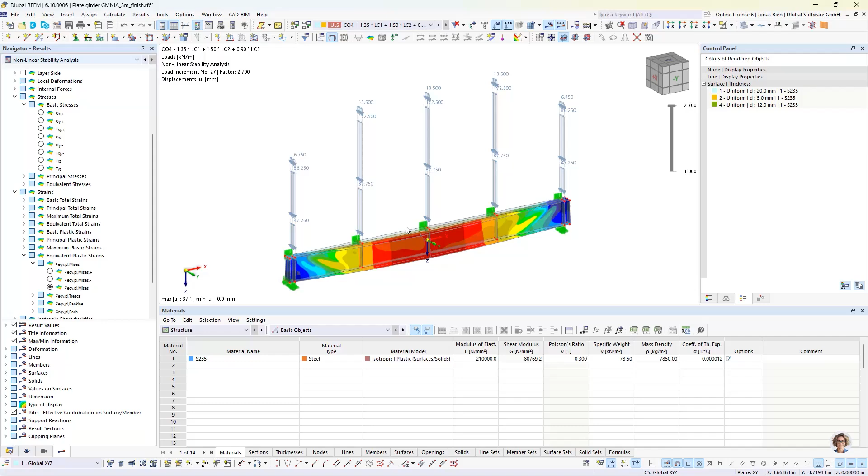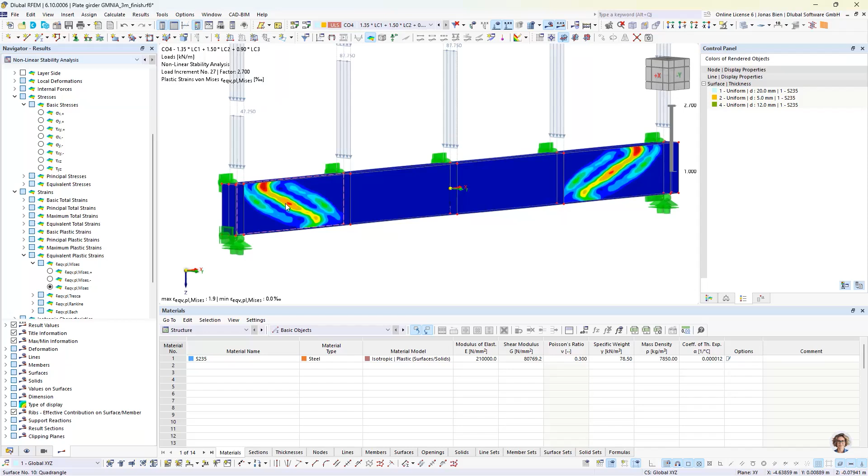Of course, due to our imperfection, we also have some transverse deformation occurring in the model, but they are not as pronounced as before. Instead, if we now look into our strains in the model, we see that the maximum strains now are not found anywhere near midspan, but in the buckling panels close to the supports, and those are also a bit higher already.

So they are nowhere near the 5% limit, but we can see that the strains throughout the last load increments increase drastically in these shear panels. So in this case, we could expect a whole different failure mode - not the global buckling, lateral torsional buckling mode, but rather a shear buckling mode in these external buckling panels here, as a critical failure criterion.

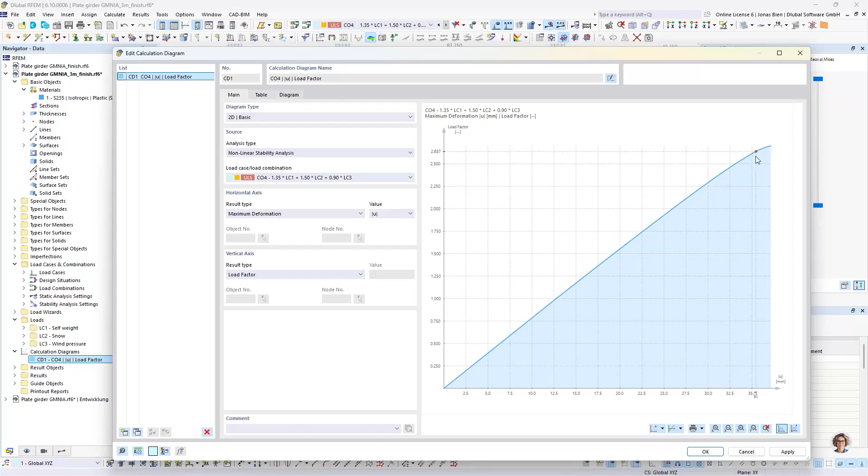We could also see how this nonlinearity or the excessive deformation in those shear panels affects the global load bearing behavior, and we can also see that the stiffness of the global system becomes much smaller.

Okay, so that for me would be very interesting to see when these different failure modes diverge, what do I get when I change certain parameters, like the web thickness, for example. So that's quite a nice exercise to do, and if you have a fully parameterized model, it's very easy to do as well.

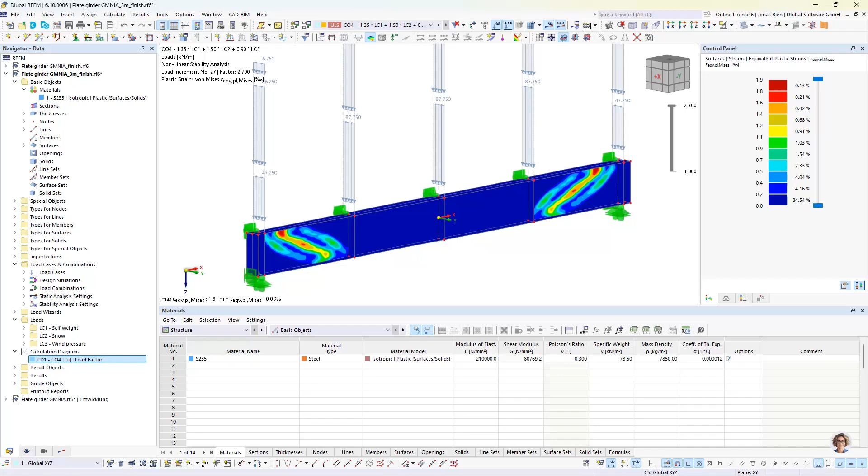That would be all I want to say regarding the results, but before we get to the summary, I would highlight that we chose the direction, the mode shape, and the combination of our imperfections more or less arbitrarily due to time limitations. The Eurocode, however, stipulates that imperfections should be combined such that the lowest load magnification factor results from the simulation. This means further investigations would be necessary, checking other imperfection directions and combinations between the bow imperfection, flange twisting, and local buckling shapes.

For the initial model with 4.5 meter long buckling panels, taking a different mode shape, especially mode shape number 13, which involved deformation in the internal buckling panels, together with a member bow imperfection, and then aligning the imperfection direction of this member bow imperfection with the local imperfections, we get a slightly smaller critical load factor of 1.82. Remember that in the initial step with our initial guess, we got a load factor of 1.95, so there's quite some difference.